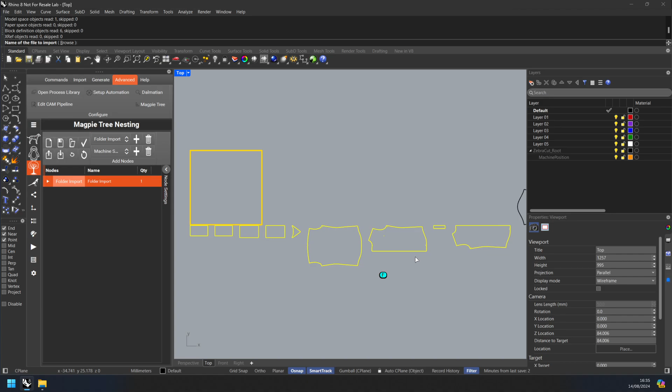That's my folder containing all of our files, so I'll go ahead and import that, and you'll see that it's going to go ahead and import every single one of those DXF files into the same canvas in Rhino. Now that'll take a few seconds to complete. You'll see there's a couple of things which just need to be sorted out once they're all imported.

For example, here there's a notch which is in the middle of nowhere, so we'll just delete that. And then on these two notches we need to delete the vertical line because it's not being picked up as actually within the boundary of the part. So just very quickly we can see what's wrong automatically. We can just manually delete these things. And then we can clear layers, and that's all hidden and tidied up.

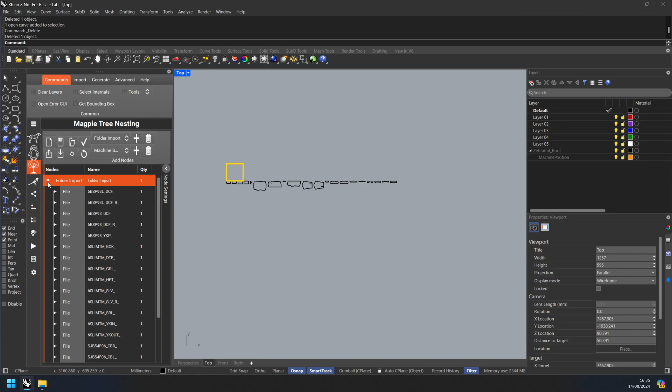So once that's imported, we can see our list of different files, and then I can click on any one of them and it will zoom me to that particular shape, and I can then change the quantity that I want to nest. For example, maybe I want 3 of these, or maybe 2 of those perhaps.

Okay, so once I've done that, I can then save that as a 3DM, a Rhino file, and then I can reload this and I'll be back at the same point with my same kit. Obviously to nest I need to have a sheet. I can then add a sheet in various ways. So I could add a sheet the size of our machine using a machine sheet.

I could add a roll of a particular width. Maybe I've got some pre-saved rolls of different widths that I could load from a file, maybe with some saved files, saved sheets. But in this case I'm just going to cut from a large rectangular sheet. Obviously I could change the width and height of that if I ever wanted to.

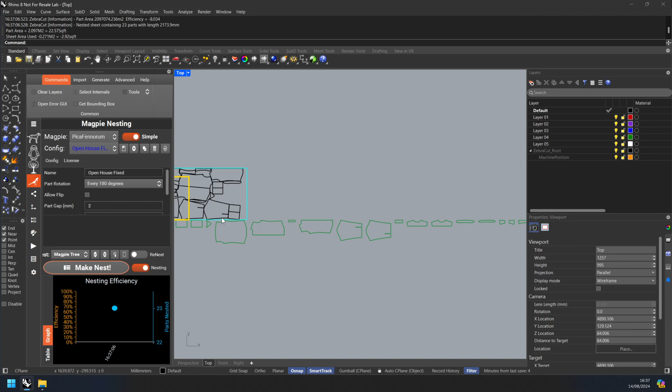Once I've done that, I can go ahead and go to Magpie. I'm going to nest from Magpie tree, and I can then go ahead and make my nest. Once it's nesting well enough, I can stop nesting. I can then go ahead and go to my layers here. I don't want to cut the sheets. I just need to use these 2 layers, one of which I want to pen mark.

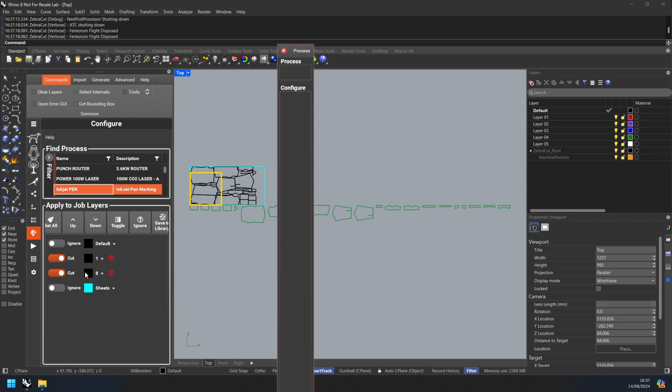So I'll find a pen, which is going to be on layer 8, and then a drag blade for layer 1. I can then go to preview mode and select the geometry that I want to cut, all of that, and then I can run my preview.

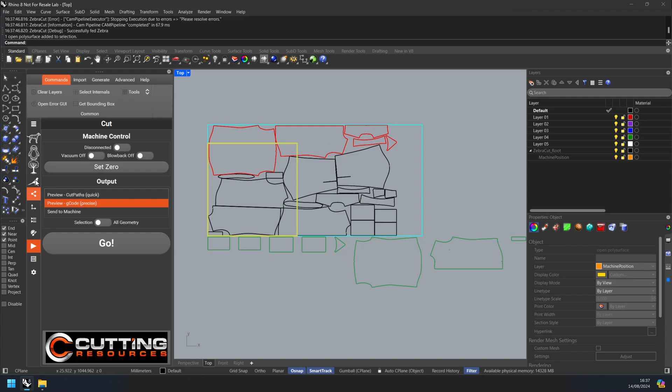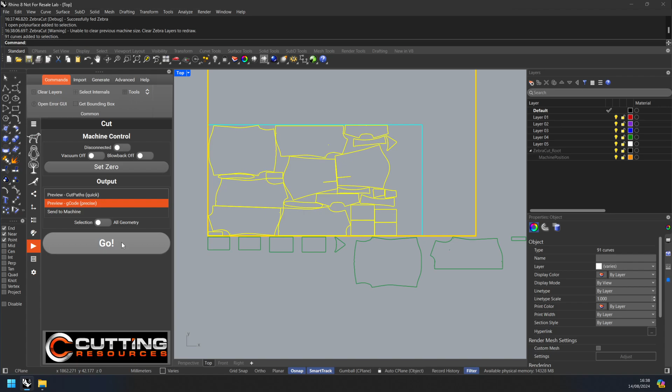In this case, my machine is too small. I'll just change my machine to be slightly larger. That's the yellow box there. So we'll make this a machine 3 meters by 2 meters. Okay, much larger sheet. And then I can go ahead and do my preview. And there's my preview, 2 minutes 20 of cutting.